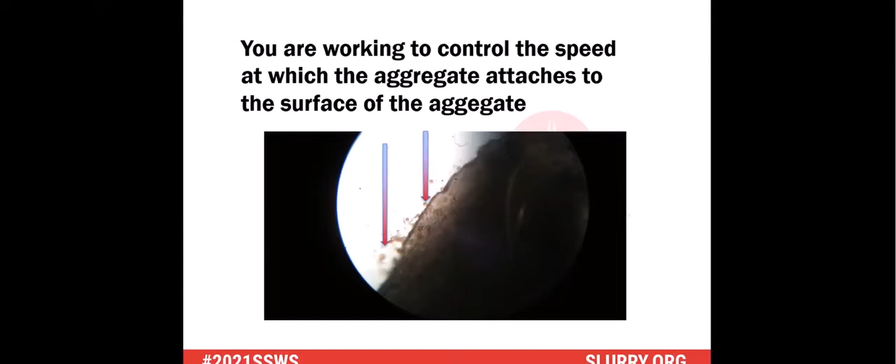Okay, so these are the things we're thinking about when Pat's doing the work, or we're doing work here in the Tulsa lab. How warm is the weather going to be? How warm's the air going to be? What is the formulation going to be? Then there's the civil engineering aspect of how much asphalt we need in the mix, and what we can handle physically in the mix design range.

So in terms of temperature, it's going to affect mix time. Cool generally slows down the mix, right, Rich? Right. And when we talk about temperature, as we said earlier, there's the temperature of the aggregate, the temperature of the emulsion, the weather temperature, the ambient temperature, the surface temperature. However, one that a lot of people miss is the water temperature. The water temperature will have an effect on the mix also.

So if you have water that's heated for any reason in your machine, it may accelerate the break time and reduce your mix time. Yeah, something as simple as a water truck on the job site that's painted black. There were bad situations where crews were working at night, and it was standard operating procedure for the crew to go get water early in the mornings after they'd shut down, and fill up all their tanks so they were ready to go that evening. However, they struggled early every evening when they'd start up, but as soon as they'd go get their first load of water, the problem would go away.

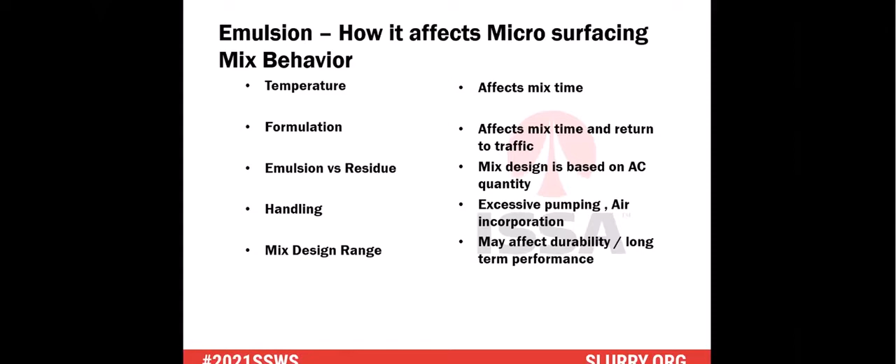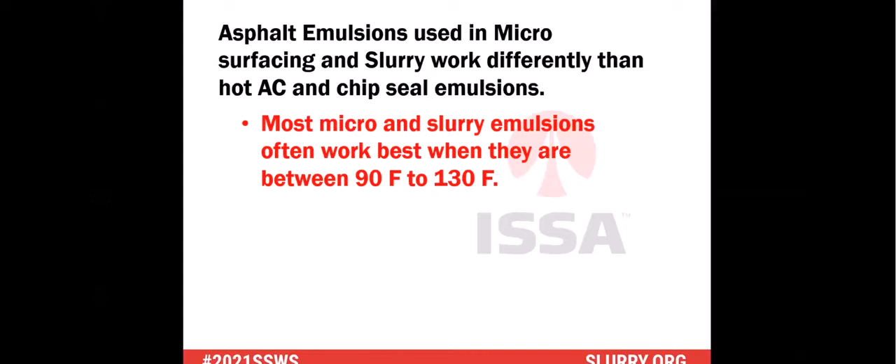When it comes to microsurfacing and slurry, the work is different than hot AC or chip seal emulsion. Microsurfacing or slurry emulsions work best between 90 degrees Fahrenheit and 130 degrees Fahrenheit. Microsurfacing emulsions and slurry, as we mentioned, when they are too hot, will reduce mix time and laydown time. And it's always good to listen to your actual supplier.

They may have a preferred temperature in terms of loading and delivery and use, but again, the intent is something that remains stable but isn't so reactive that when it sees the rocks it attacks too fast, basically, right Rich? That's right, and a little extra heat will not help you here. It will just accelerate the way that it breaks. So hot is not better with microsurfacing or slurry, whether that heat comes from storage, hot rock, or hot water. Chemically it all has the same outcome in terms of the placement.

Those of you that remember your basic chemistry know that every time you increase temperature 10 degrees, it's going to double its reaction speed. You're running a chemical reaction in the back of that truck. So you want to avoid doubling the speed of the material if you're already working pretty hard to get it down, right Rich? Yeah.

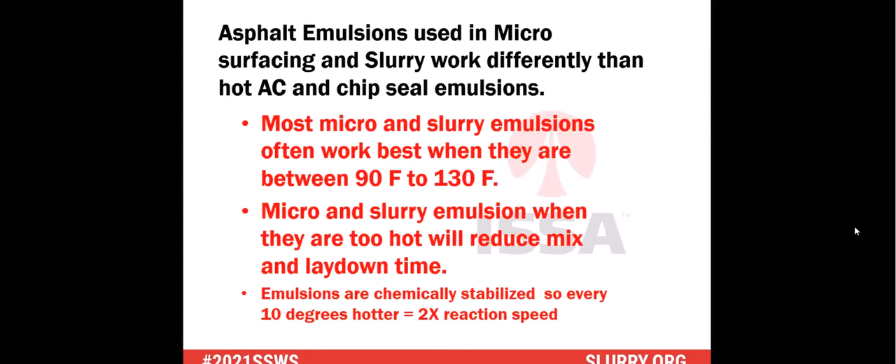Okay, weather forecast. Once again, we're back to planning. Weather can have a significant effect on mix time, break time, traffic time, even long-term durability. Things to think about when planning is what type of work.

If it's cool in the mornings and warm in the afternoon, cool mornings may be a good time to do approaches or a lot of hand work. Warm afternoons, say you're working on a major arterial street where you have to do the approaches and then the main lanes, you might want to do the approaches earlier in the morning and do the main lanes in the warmer afternoon, or as the temperatures rise.

As we've said, temperature speeds up the mix time. So when you have traffic coming at you from all directions, you have a little better chance to protect it the faster the system is breaking and curing out. It can have an effect on start time and stop time because of the amount of time it takes to cure. Cloudy weather can slow it down some. Even though it's a chemical break, sunshine still produces heat and will accelerate that break on the system.

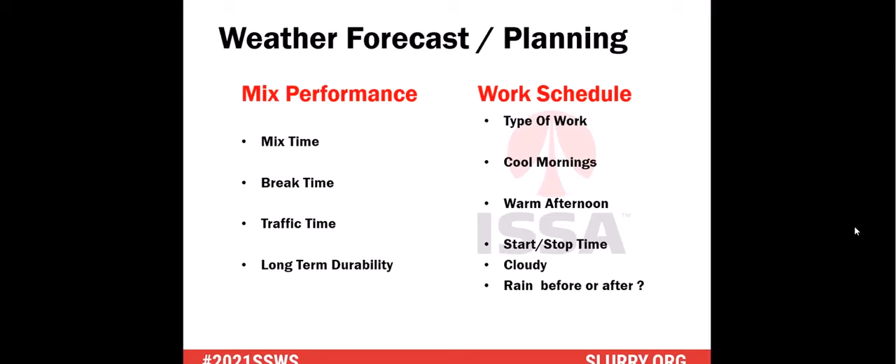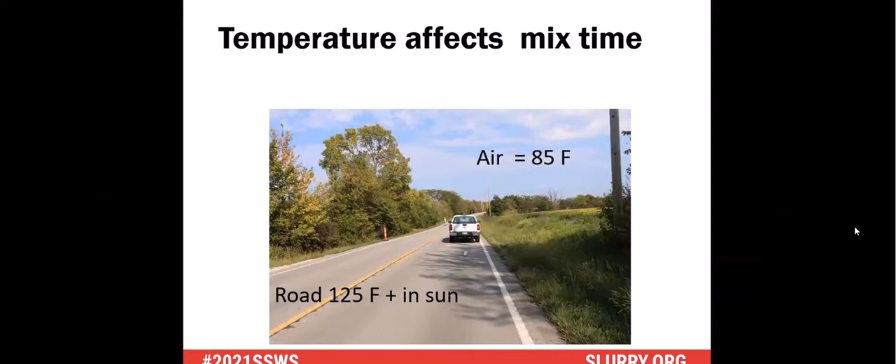Just to illustrate the effect of clouds and roadway temperature: even on a nice day, perfect 85 degrees Fahrenheit, that road's already 120 to 125 degrees. So that will make the mix react quickly as it comes in contact with the road. If you're ever out there with an IR gun, shoot that road, especially on a new micro or slurry. It's black, it heats up pretty quick once you've gotten the water off the surface. Roadway temperature is another important thing to monitor. Some mornings, early or late season, that road may be really cold even if the air temperature has warmed up a little.

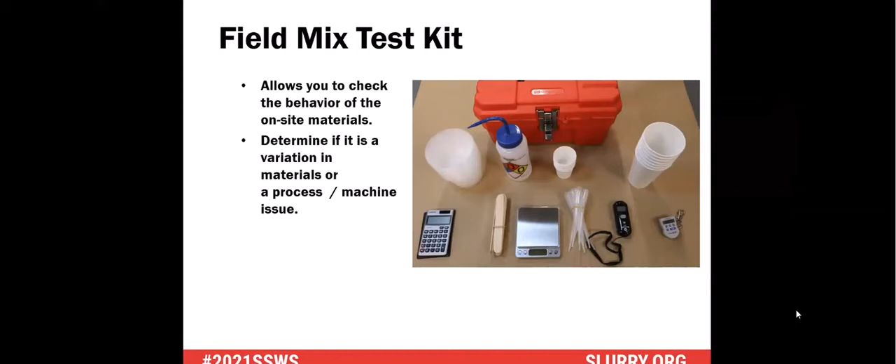So really, all you need: portable scales are cheap now, something to stir with - in this case simple tongue depressors, a timer, and a temperature gun. Add a little water and measuring cups, and that entire kit might cost you $25. But it can save you a lot of time and headache if you go down for any reason, helping you figure out where the problem is really at. And it saves you running back to a laboratory, which can be a real time saver.

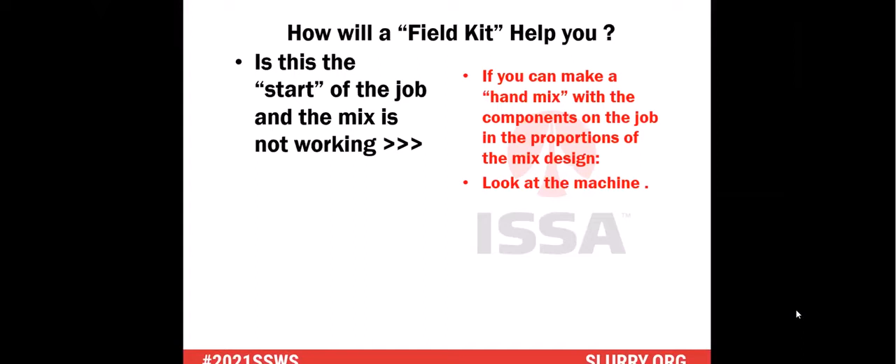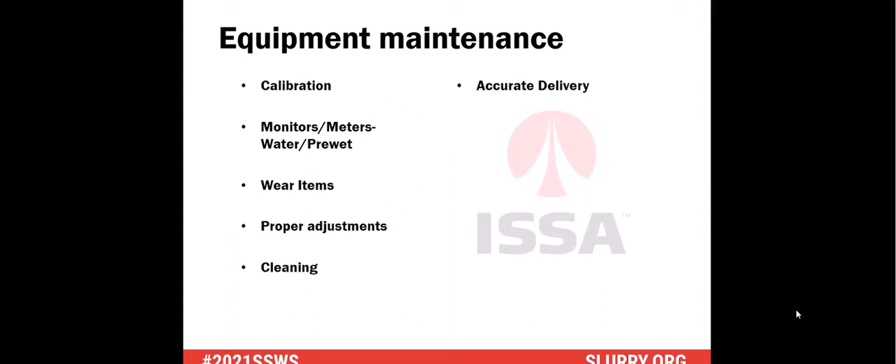Now, one other thing we want to talk about is equipment maintenance. It's important that your machine is calibrated and that you periodically check that calibration. It's important that the monitors and meters, whether flow meters or whatever, work properly, and that you check wear items - pug paddles, different skirting on conveyor belts - to make sure they're properly adjusted and not worn out. Cleaning is so important, keeping your equipment clean - the spreader box, the pug mill - if you don't get it clean, you're going to get drags and an ugly surface that's just not pleasing to look at.

As far as calibration and accurate delivery, the monitors and meters show trends over time, so you can see if the water or pre-wet is going up for no apparent reason - it could be temperature or other things, but it's a telltale sign something's changing, so it's worth looking at. Wear items can have a lot to do with mix performance and how well the mixer mixes or the spreader box moves material with the augers. Proper adjustment can have a significant effect on mix placement. And cleaning means fewer drags and a much more pleasing looking surface.

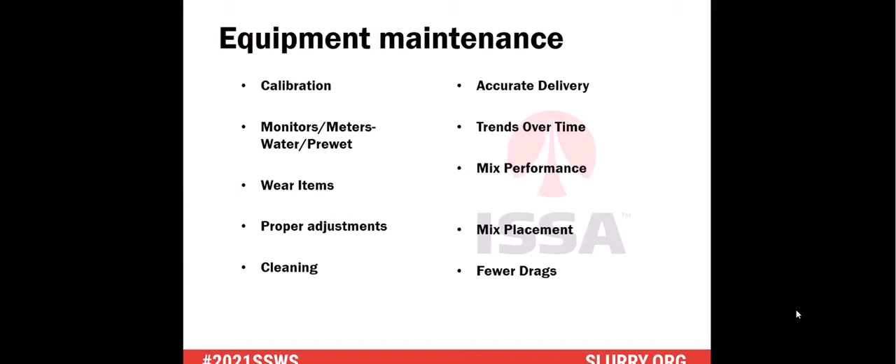Walking around a machine, knowing what you're looking at, even asking the operator what things are doing, is a good thing. I was on one job where the mix was sloppy wet, it wouldn't cure. We monitored the water, turned it down, and it stayed that way. Finally we had the operator turn the machine on and found one of the electronic valves had failed - the minute the machine went on, it just dumped water into the mix whether you wanted it or not. It was in the additive system. We had proven to ourselves using a field kit that the mix should work, so we were really scratching our heads, but it was a single valve on a single dilution line for the additive that caused the problem. Without the field kit, we'd still be out there trying to figure out what was going on.

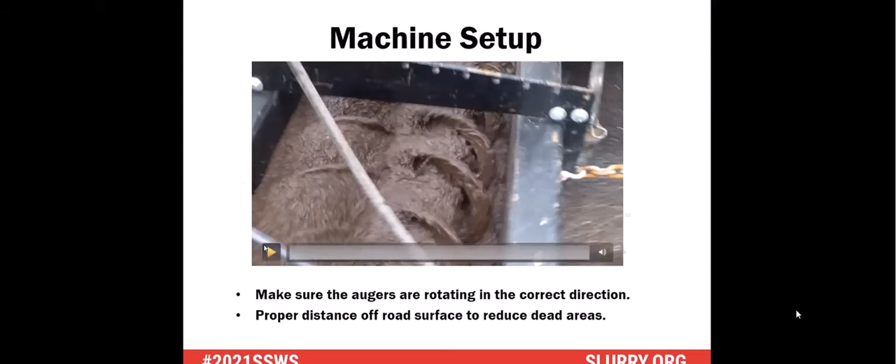Okay, just a little short video. As I said, on the proper adjustment, I don't know how many times I've been out on a job, even when it was my own job.

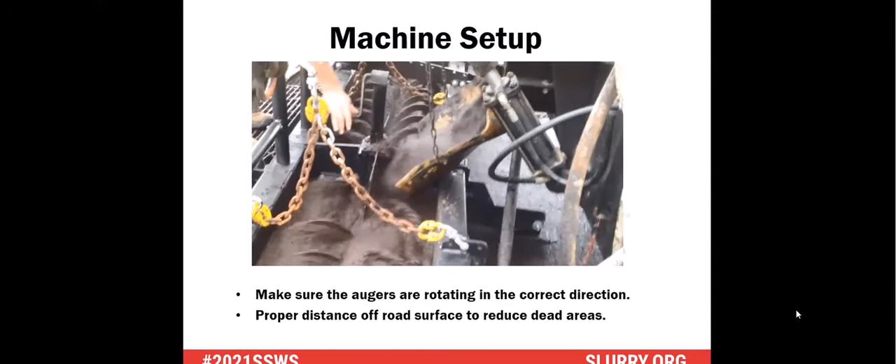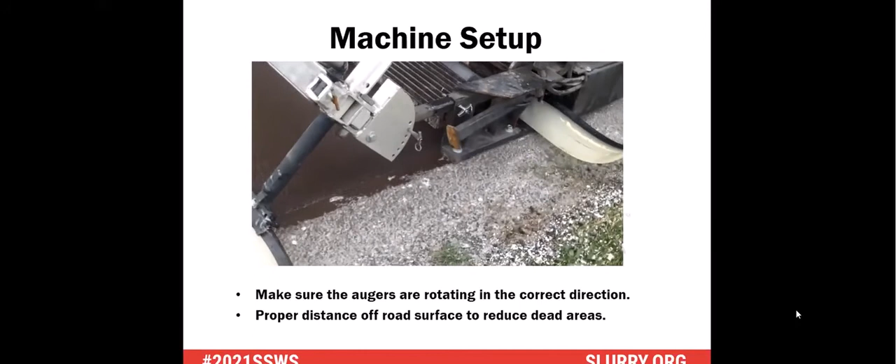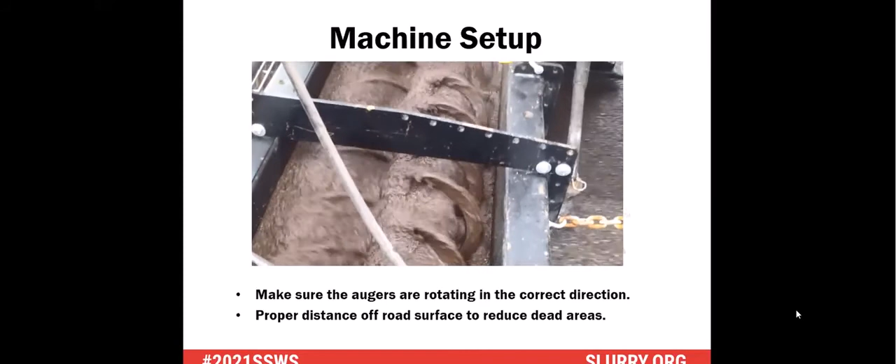First job out, I put in new augers all ready to go, and I had them flip-flopped, turning in reverse and not moving the material efficiently. It's important that the rotation of the augers is correct and that the distance off the road surface is reduced as much as possible to reduce dead areas. The tighter you can get those augers to the ground and to that back strike off, the smaller that dead area and less buildup you may get.

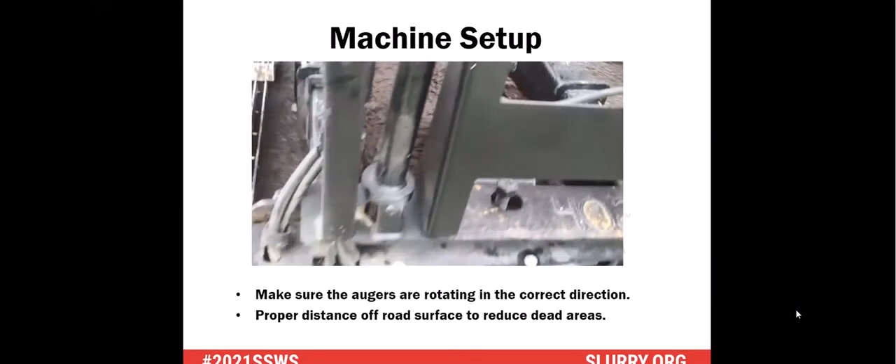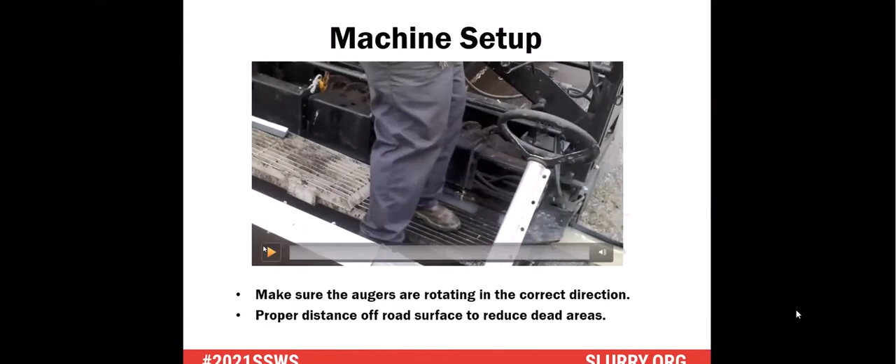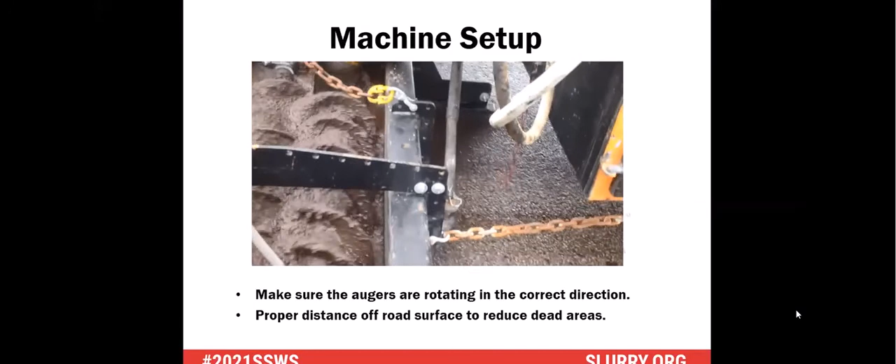So again, you may want to just walk through, Rich, how that auger's pulling the material through the box. Well, you want the rotation of the augers so the bottom of the auger is coming back towards the back strike off. If it's turning the other direction, the spirals are trying to pull the material out and throw it forward, and a lot of times it doesn't move it efficiently. It also throws it forward and kind of segregates the mix. So it's important that your augers are turning in a rotation to where they're using the strike offs to hold the material against them.

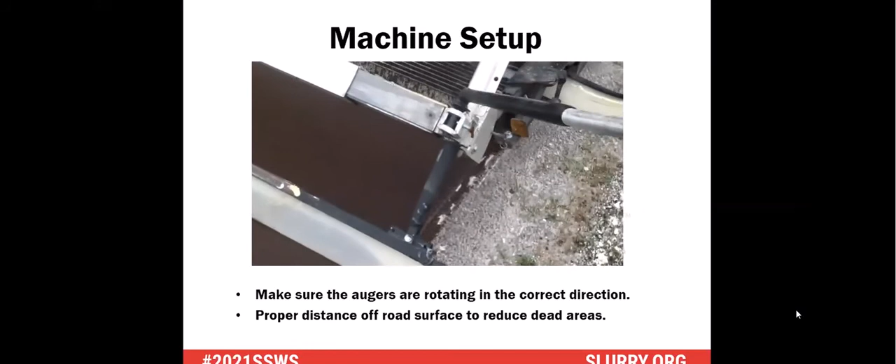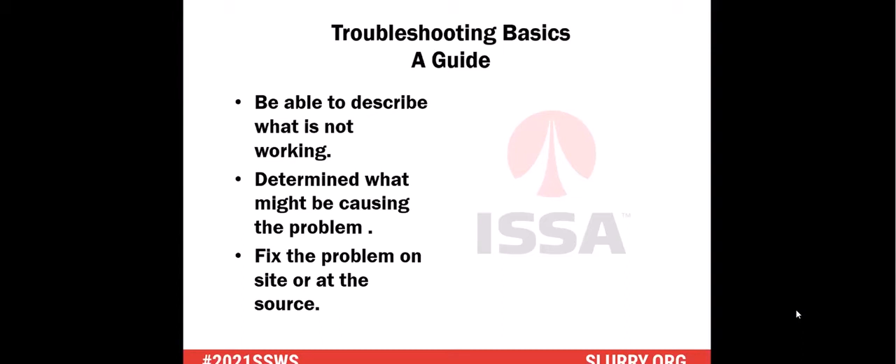Determine what may be the cause of the problem. A lot of times you have to be careful, because you want to keep looking sometimes, because you may find a symptom of the problem, and by fixing that you really haven't fixed the problem. So it's important to try and go back as far as possible to fix the actual problem when possible, and fix the problem at the source.

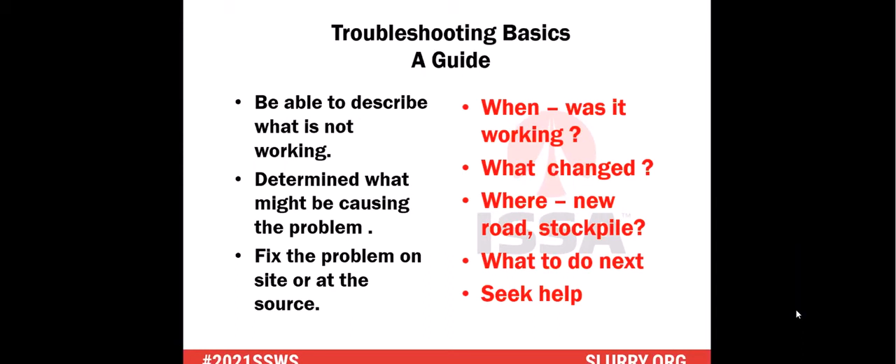Then ask yourself, when was it working? What changed? Was it a new road, a new stockpile? What to do next? And seek help if necessary.

As we said earlier, when should troubleshooting begin? Don't wait till the wheels fall off. You can troubleshoot and find telltale signs, symptoms of problems that are brewing, and usually head them off before they become a real problem.